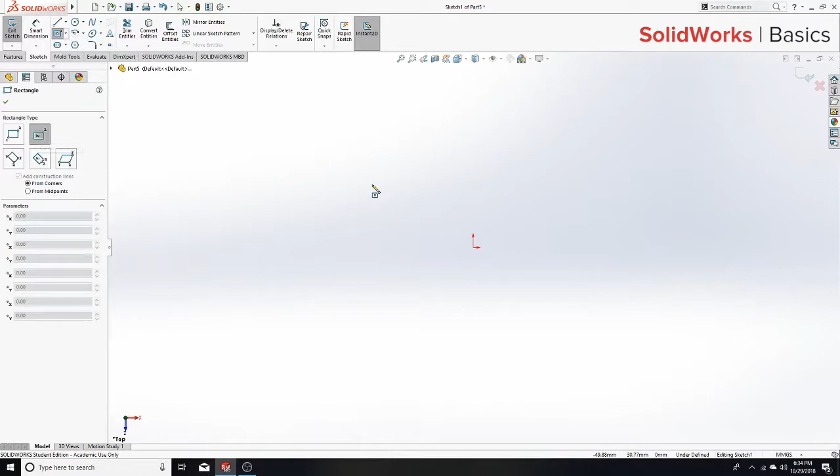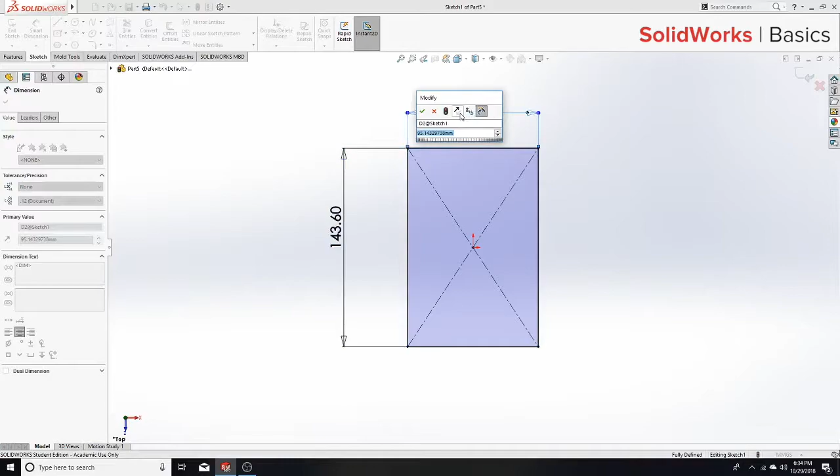To start off, we'll go with a square rectangle around the center origin. Click there and then click the second point in order to pull that across. Once that's across, we'll go ahead and Smart Dimension it to lay out the dimensions. From online, I got that the iPhone 10 is 143.6 millimeters tall and 70.9 millimeters across.

From there, we have the general shape. You can see because it's outlined in black that it is fully dimensioned.

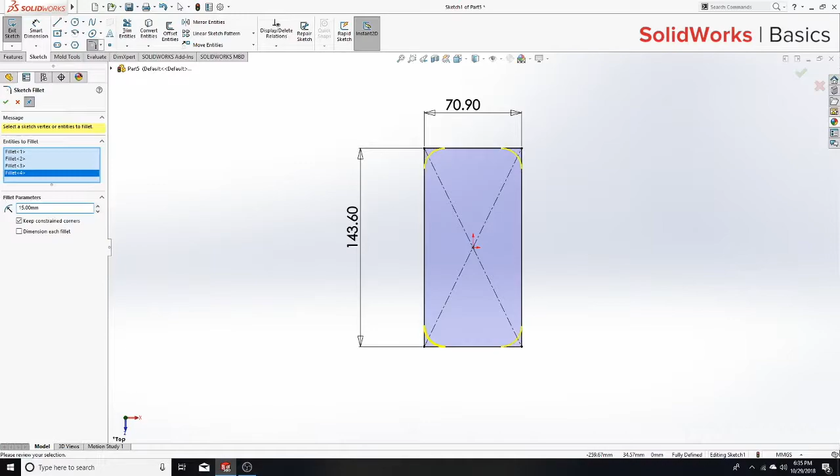Then we'll add the general rounding of the corners that's synonymous with the iPhone. We'll go ahead and click all the corners once we hit our fillet tool, and you can see here we can change the radius of that circle. If we wanted to go up to 15, that looks a little too wide to me, so I'll keep it at 10, that's standard. We'll go ahead and click OK, OK.

Now our sketch is done, so we can go ahead and click submit up in the top left-hand corner to make that happen.

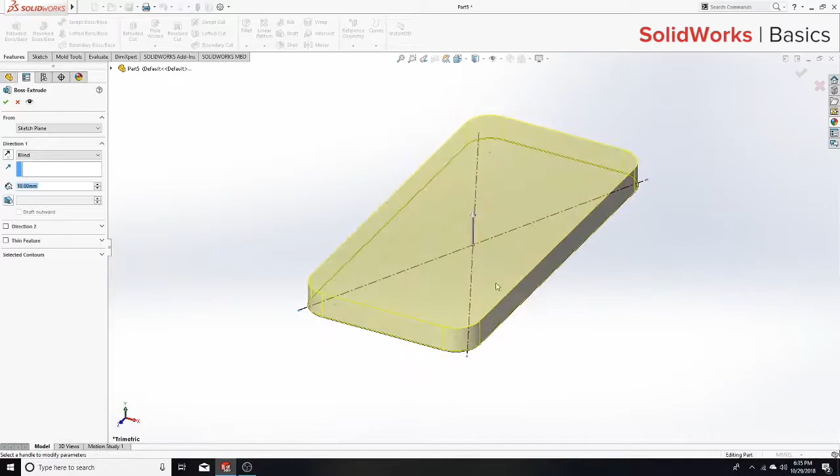Now that we have our sketch fully defined, we'll go ahead and extrude the base. You can see here that it's pulling straight up from there. It's generally best practice to extrude from a midplane, so this centers it about that top plane. This is really good if you wanted to add buttons later on, you can make sure they're perfectly centered, or if you wanted something else around this outer edge.

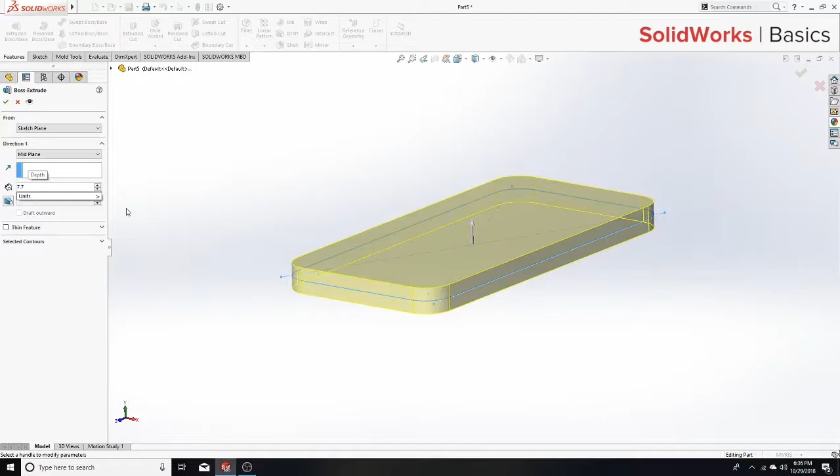From online as well, I did get that the iPhone is 7.7 millimeters in width, so we'll go ahead and click OK there.

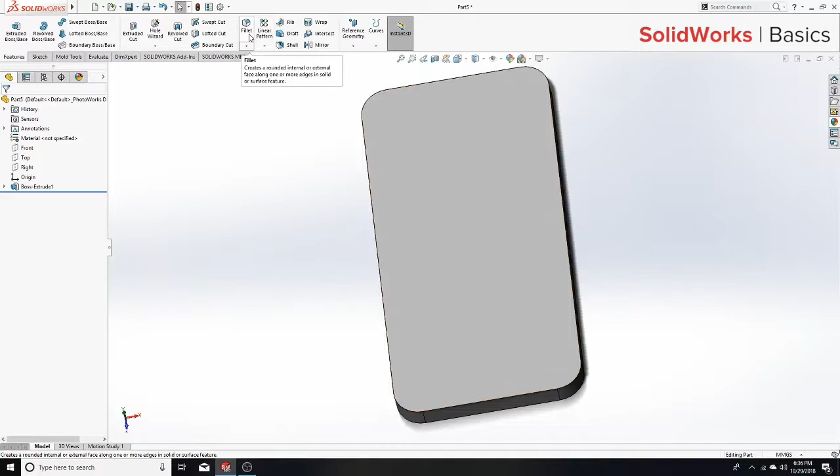Perfect, so we are getting the general shape of this, but another thing that's really synonymous with iPhones is the nice rounded corners, and you can see here they're squared off almost as if they were one of those original iPhones. Again, we'll do the fillet tool, but this time in a three-dimensional space.

We'll click the top surface and the bottom surface. Because this is not rendering, it's because it's too big on the size, so we'll bump that down, see if 2.5 works. Looks like that's good, so we'll go ahead and click OK.

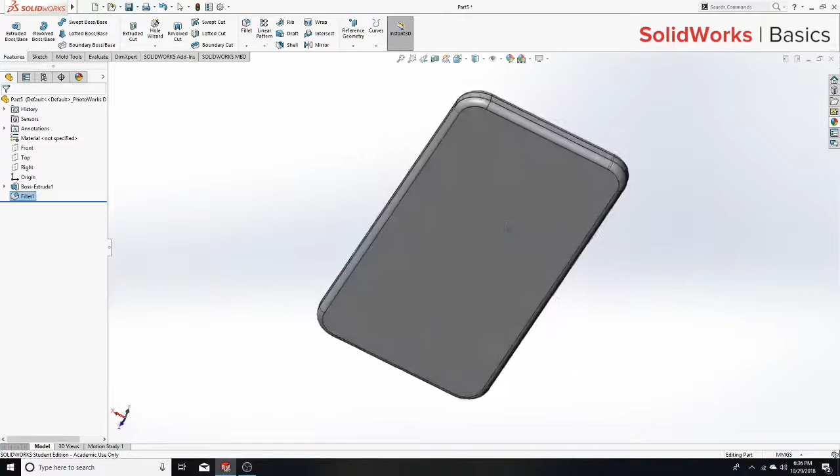Perfect, so now that's the general shape of an iPhone. You can see as it's resting on the table, we have the nice rounded corners on the top, the rounds on the side, and you're able to go ahead and do the full shape.

Now that we have that done, we'll finish by saving. I'll just save straight to my desktop, and I'll name it iPhone.